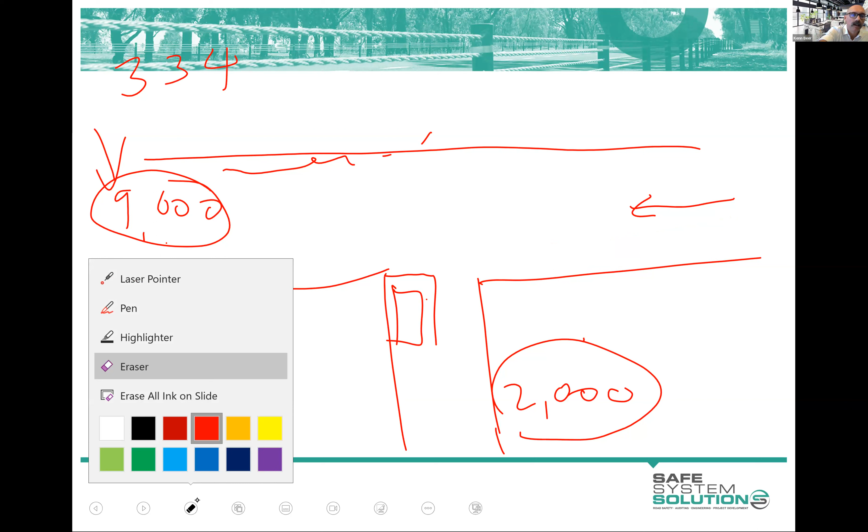So that's one thing. Then if you're worried about this sightline issue here, that vehicles can't see approaching vehicles because of that car parking, and if you proposed to remove the car parking, okay, you've opened up that sight line. That vehicle is now very clear. You can clearly see the vehicle. That has influenced the likelihood of crash only, because there's less chance somebody will make that error to pull out.

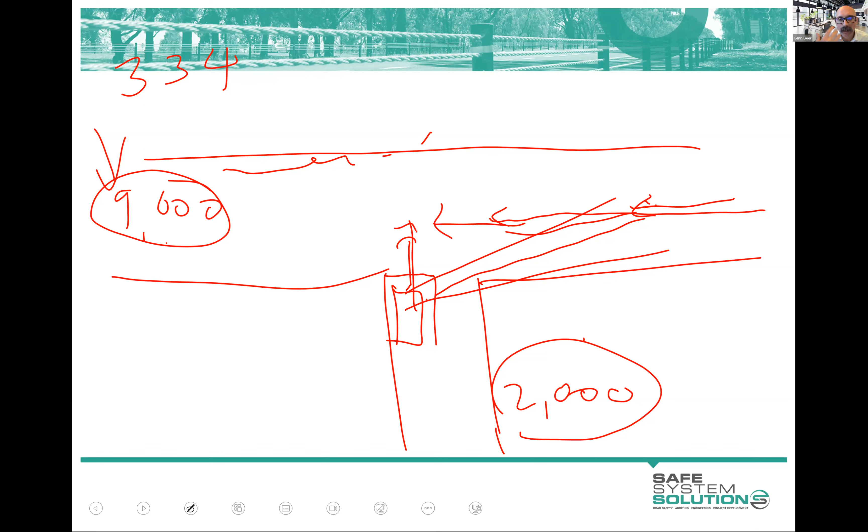Now, some of you will be saying, but this vehicle's now got better time to see, to slow down, and so any crashes will be slower. And that's true for the bulk of crashes, but this vehicle can still be traveling along unabated, they have priority, and this vehicle at the last minute pulls out, and we have the same severity, we have the same angle, so that severity remains. Okay, less numbers of crashes will be at that severity, but they still can absolutely occur. So that's why we'd only call the removal of that parking a supporting treatment.

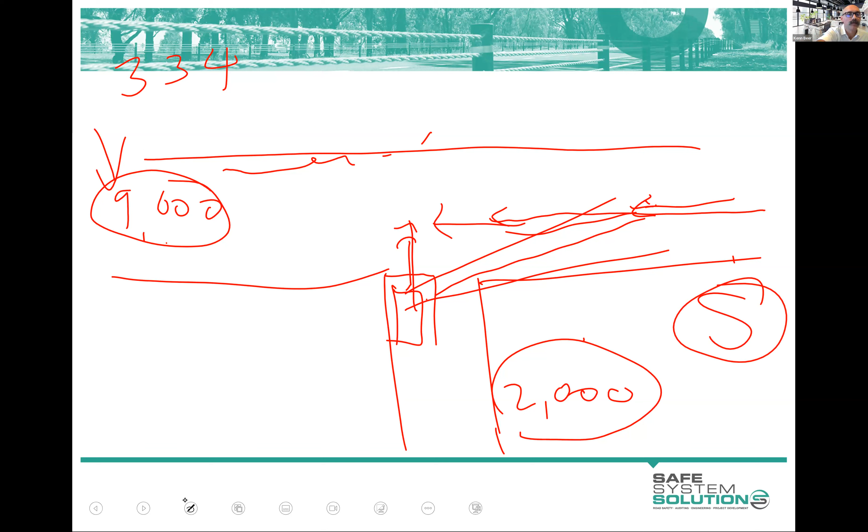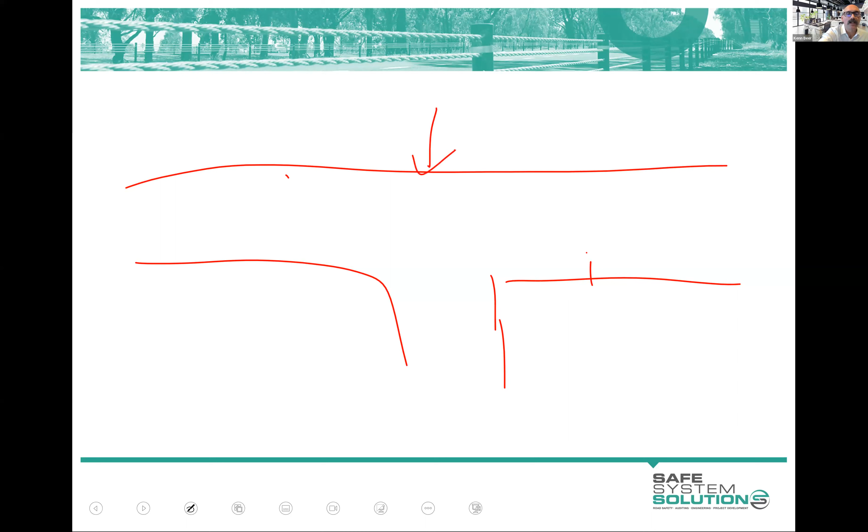The primary treatment in these situations is the measures that actually change the speed of the vehicles into tolerable levels for that vehicle-to-vehicle crash. So that could be a roundabout, it could be raised platforms, for example. Raised platforms through here, or a raised intersection, something to slow this vehicle down. So that means that that vehicle is going to slow down regardless of whether there's a vehicle coming out or not.

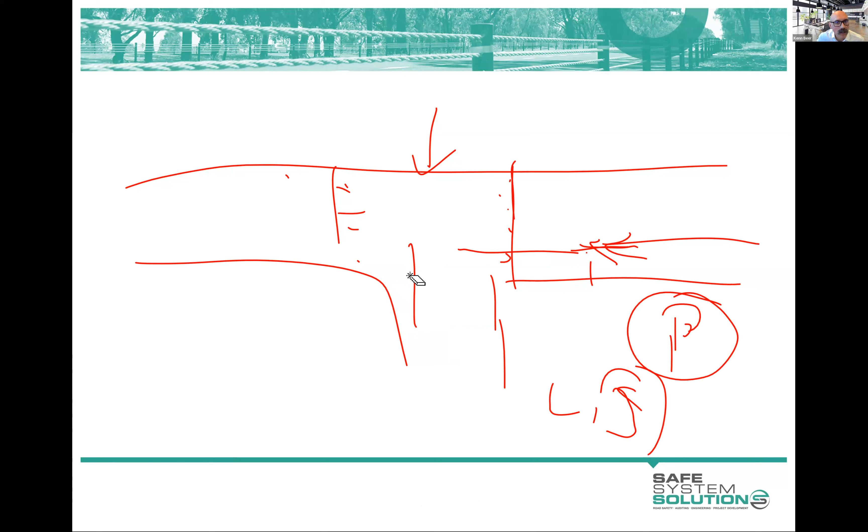And so those are primary treatments, and they address both the likelihood and severity, or sometimes just the severity of crashes. What else do I want to say on that? A primary treatment in this scenario would also be to block off the intersection. I think we've been through that sort of example before, but I thought it was worth doing again, and maybe it's sparked a question or two.

I think some lights are flashing here, which means somebody's asked a question. Yeah, Ken, would there be a runoff road exposure figure for each road segment, or do you look only at runoff road for the major road? That's a very good question, and let me explain that then. I'll draw the intersection again. So you got 9,000 here, and you got 2,000 here. So of course, there is runoff road risk down here for these 2,000. But in this assessment, you would take the 9,000 and assess that if you were doing the intersection.

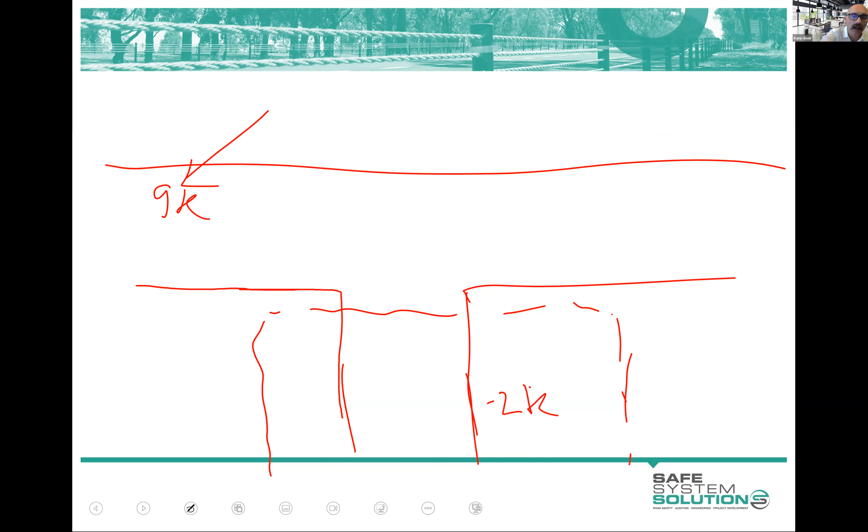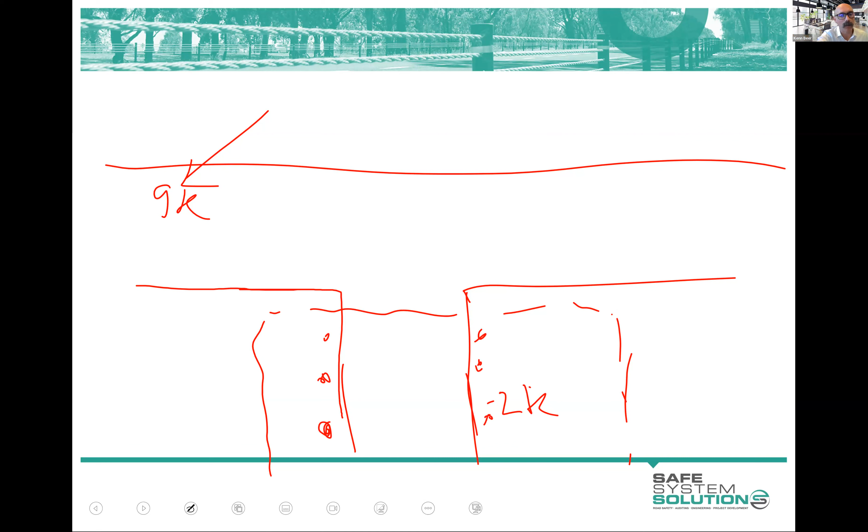But if you wanted to look at the 2,000, what you'd actually have to do is do another matrix for some other scope down here. So you'd have to do a second matrix. The reason for that is that you end up clouding risk or enhancing risk if you focus on that. So the easiest way to explain this is, say you've got power poles close to the road down this. If you then say the likelihood is this number and the severity is this number, but the exposure is that plus that, then you're saying there's a high exposure to these risks. Well, there's not, is there?

There's a low exposure to that risk, or a lower exposure. It's 2,000. So you need to then separate that out as its own entity. So we take that, and you might make some comments about that in your assessment, but for runoff road, head-on and generally for other or sideswipe crashes, it's taken off the main volume.

What if it's a four-way intersection? Again, you take the highest volume road and you assess it. But if you had exactly the same volumes, you might need to do two assessments, and just pick one. We're assessing that, and then we're going to assess that and that combined. They could probably combine to an assessment if they're homogeneous, if they've got the same general characteristics.

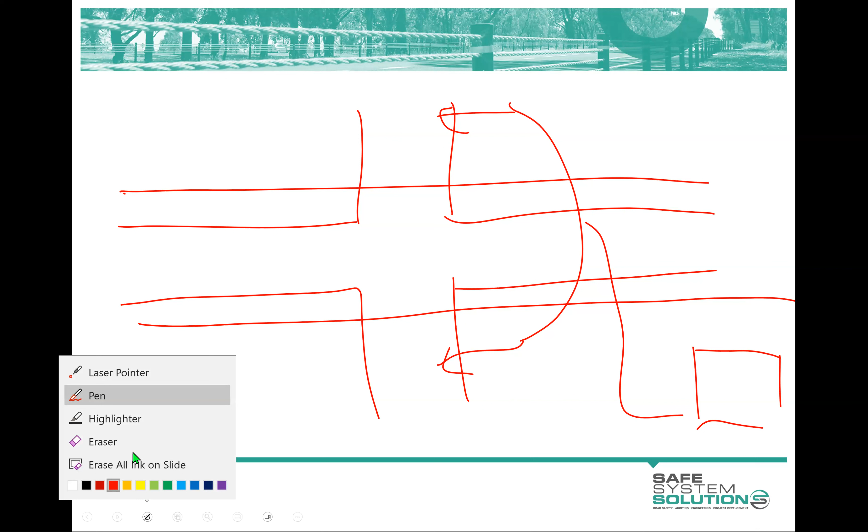Thanks, Ken. In your first example that you drew up for us, it's probably gone. But there was a clarification question that came in, which is these sorts of changes would have the impact of lower likelihood of high severity and higher likelihood of lower severity. Is that a correct interpretation? Possibly, yeah.

A roundabout kind of demonstrates that, which I did put in as one of the options, where we know roundabouts tend to give us some rear end incidents. People make abrupt stops and the occasional minor bingle. So that's why we tend to not talk too much about roundabouts giving us a significant reduction in the likelihood of crashes. But that comment is absolutely correct in the sense that severity of crashes is very much down. So it's a reasonable point. Think about this from the individual site perspective, but I generally agree with that.

Some really good questions there, so thank you. And I hope that's helping people get some clarity in their mind around exposure, likelihood and severity, but also primary and supporting. But actually, I think I'm sharing screen, so hopefully I can do this.

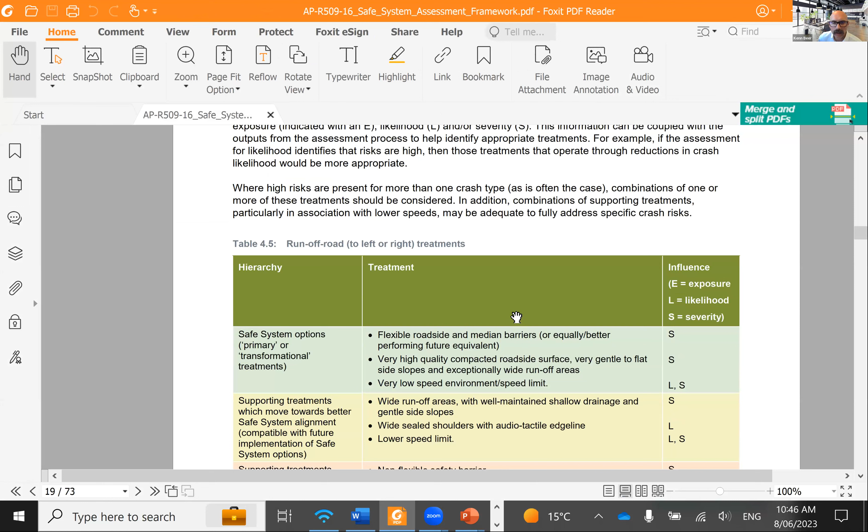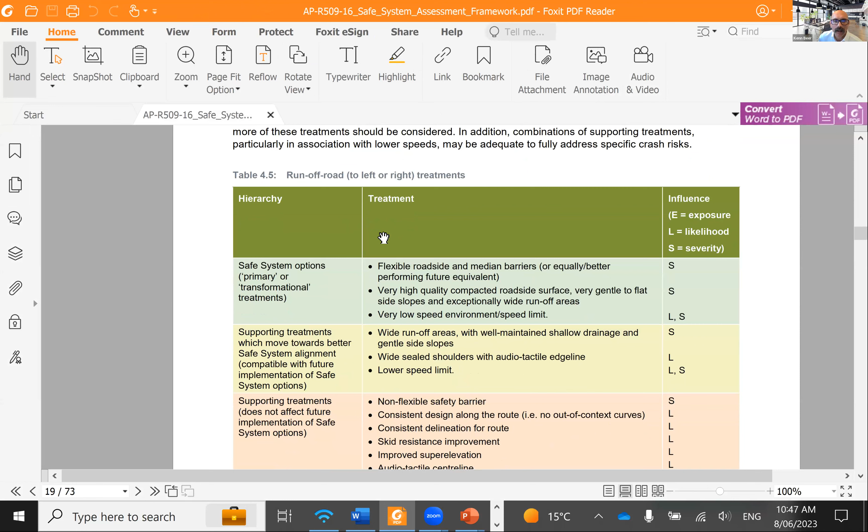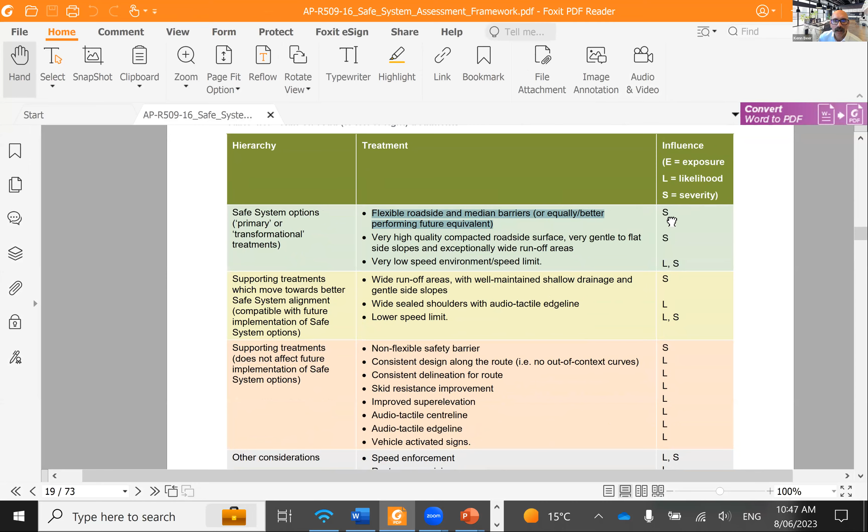So hopefully you're seeing the Safe System Assessment Framework now. Yeah, all good. So Kathy or Marissa showed you this last time, but this document's in the learning management system, in the resources, and if you get to these tables here, they've got run-off road, and they've got treatments, flexible roadside barriers, and they talk about, is that going to influence exposure or likelihood or severity? Severity there, and it's a primary treatment.

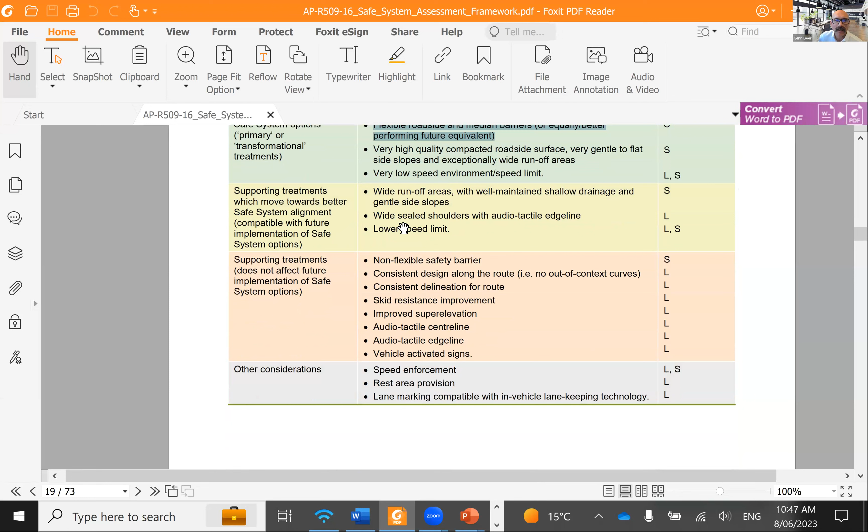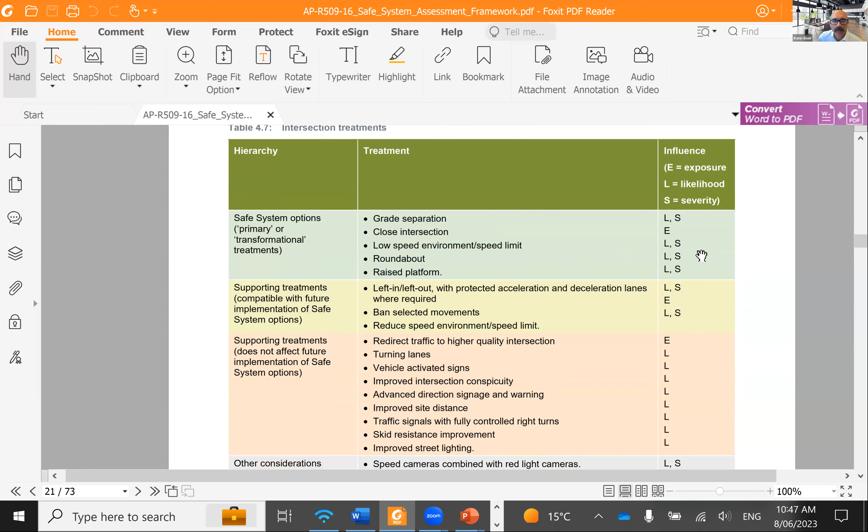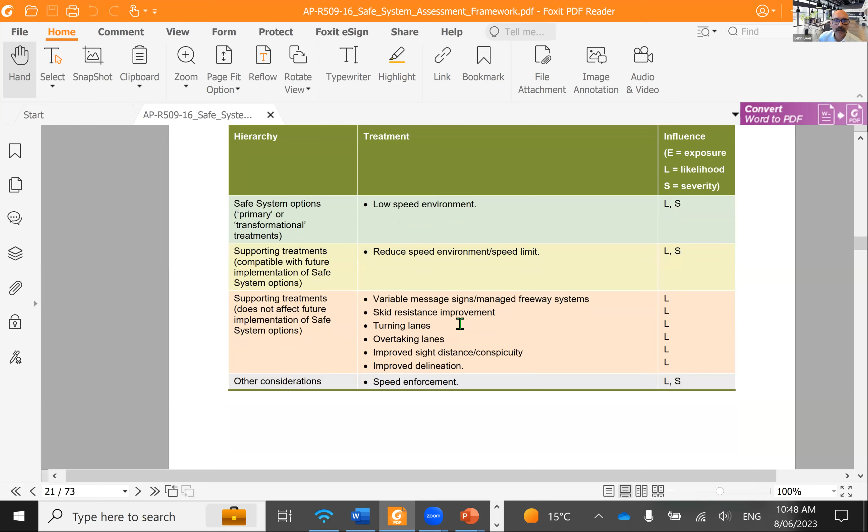So you can see these different categorisations laid out for us for different crash types, head-on treatment, all of these ones, then down for intersections. And we've got all these different treatments, and you can see roundabout. Roundabout's giving likelihood and severity. There you go. We have to accept that because that's what Austroads is saying. Raised platform, other crash types, pedestrians,

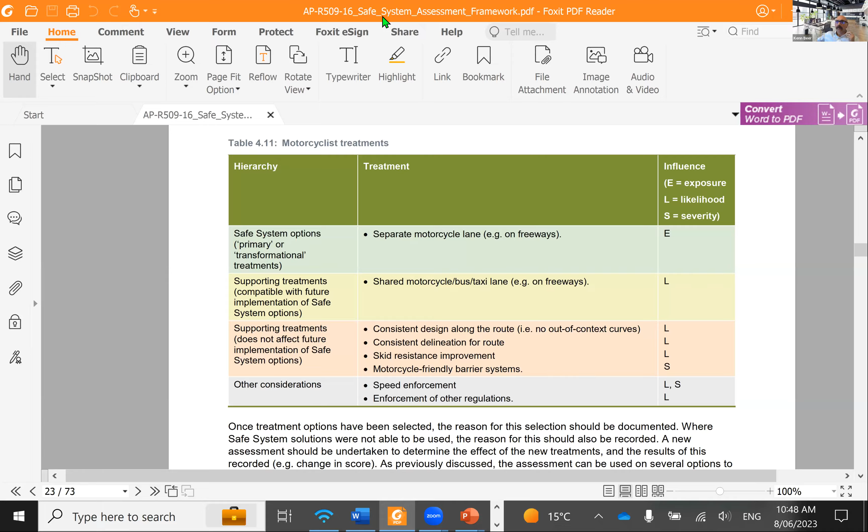cyclists, and motorcyclists. So you're getting some information there that helps you as you're trying to identify where things might be exposure or likelihood or severity, but you're going to find a lot of things that are not listed in this table that you want to write down, and then your recommendations into primary and supporting treatments. So that can be very, very helpful. So pop that over there.

And so questions come in there. Would head-on crash types have the same exposure calculation as run-off road? Yes, they do. So we use that same exposure.

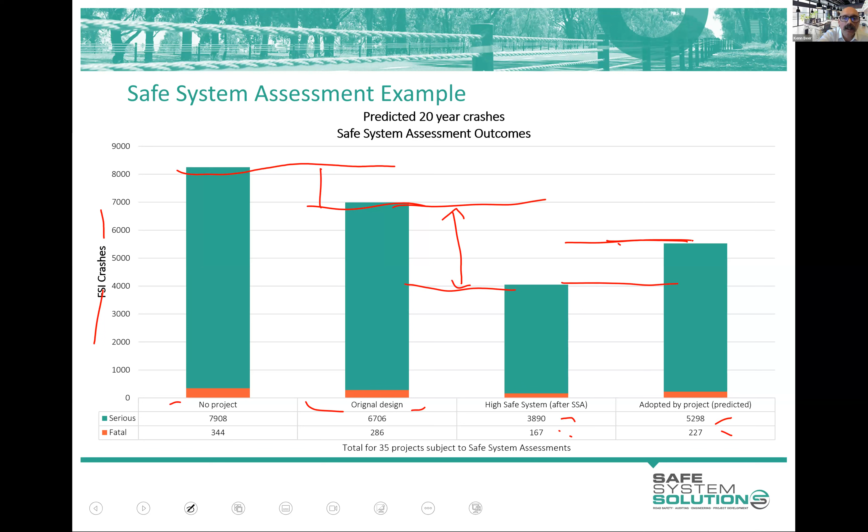But the amount we can do to get more improvement is huge. So all of this is potential improvement. The difference here is quite interesting. It's questioning, well, we recommended some stuff, but why aren't they doing it? And this is a highly interesting and complex difference to analyze.

But in that one, we see things like concerns that might not be good. The community won't accept that, or concerns politically it won't be accepted. Sometimes it's funding. They can't afford to do that. Budgets are set. Maybe they've uncovered a cultural heritage site, so they can't do that widening that you're suggesting or the like. So there are practical reasons why some of these things can't be done. But in a lot of these cases, we're trying to push and hopefully get people to do some improvements.

But the difference here to here, that is our value of safe system assessments as they sit now. It is literally just going through the process that we were able to systematically look at exposure, likelihood, and severity, identify things, make recommendations. And they were able to, within all of their budgets and constraints, make changes to these projects that have made that significant step change in death and serious injury. So it's an immediate win. Now we need to look at this and try to keep improving that and get that change to be lessened.

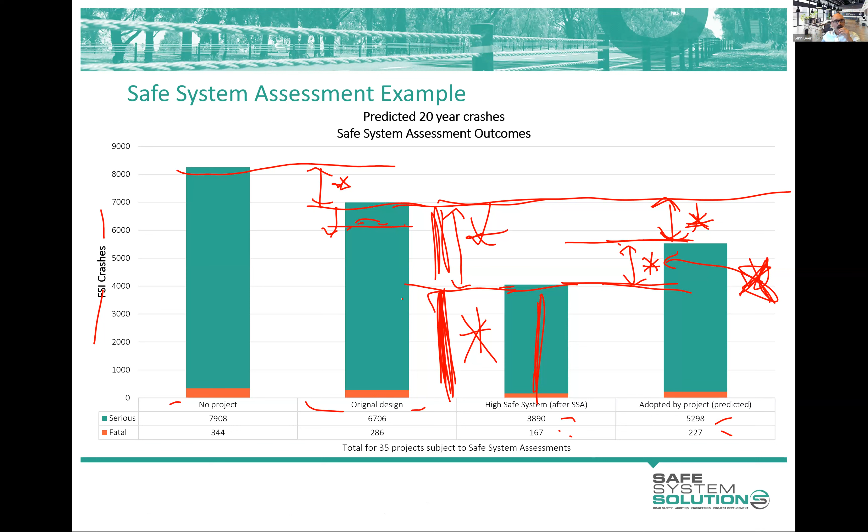Okay, let me just jump into another slide or two, and then I'll give you your stretch break.

We just pulled out of the Victorian government's document some of the benefits of safe system assessments, as identified through those evaluations, but also through their operation of using safe system assessments for 7 years now. A great way to determine how well a project aligns with safe system principles. And that's been a real shortfall before the assessment methodology, because it was really opinion-based. I mean, yes, there was agreement in the high-level strategic idea, that philosophical concept of the safe system, but once it was down to on-ground decision-making, there was just argument.

It's a great method to compare project design options from a safe system perspective. A road safety audit is not about comparing and scoring options. It's clearly stated within the Austroads Guide to Road Safety Part 6 and throughout road safety audit policies across the world. That's not its purpose, but the safe system assessment methodology is good for that. You've seen the way you could score things and you can get that input.

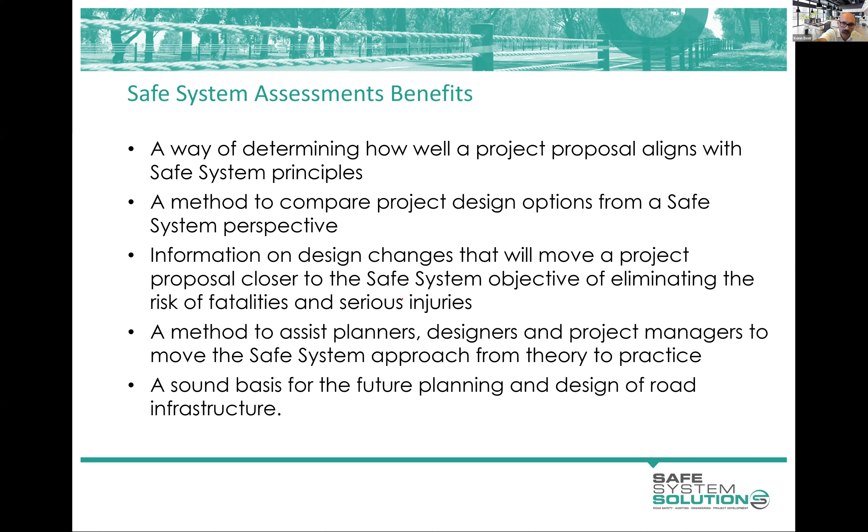So let's just go through the process of a safe system assessment. And the first thing is to say, well, when in a project's life cycle would it be good? Most jurisdictions still operate in saying, well, if we can do that safe system assessment early on and get that feel for safe system alignment, that's going to inform decisions on the intersection form, the cross-section. It's going to help us make those calls. Then when we've made those decisions around cross-sections, intersection form, the very specific details, a road safety audit lends itself quite well to that.

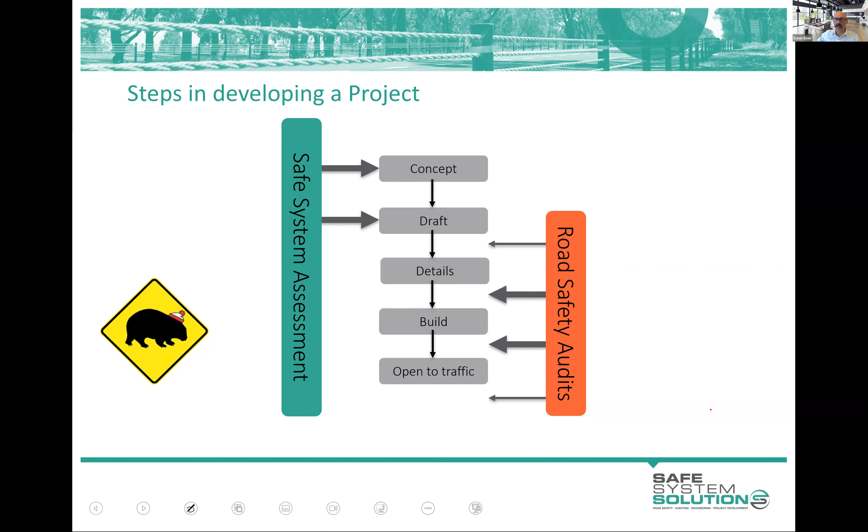Yeah, so generally early on safe system assessments and then road safety audits to follow. Not to say that safe system assessments can't be done further down the track, but that just seems to be a process that works well. But what is the difference between a road safety audit and a safe system assessment? Well, there used to be a lot of difference, and this difference is, I suppose, starting to shallow down a bit. But this table here helps a little bit.

Identify issues that impact the likelihood of crashes. Both methodologies are really good at that. Issues that impact on the severity of crashes. I say sometimes for road safety audits; they're getting better. I mean, severity is part of the risk assessment methodology in a road safety audit. However, it's more at a practical level. We used to see a lot, and we still continue to see these come through, where the road safety audit is focused on the likelihood factors, sight lines, surface, confusing signage, hugely important likelihood factors, and we've got to get all of that right.

But the severity was ignored when these happened. So they were basically saying, oh, if you fix up all the signage, we won't have any crashes. Well, the safe system assessment is saying, you fix up all the signage, and that's good because we'll lessen the chance of a crash. But a crash is still going to occur, and we need to address how bad that's going to be. Exposure really wasn't looked at as its own distinct element in road safety audits. It was embedded and entwined into likelihood.

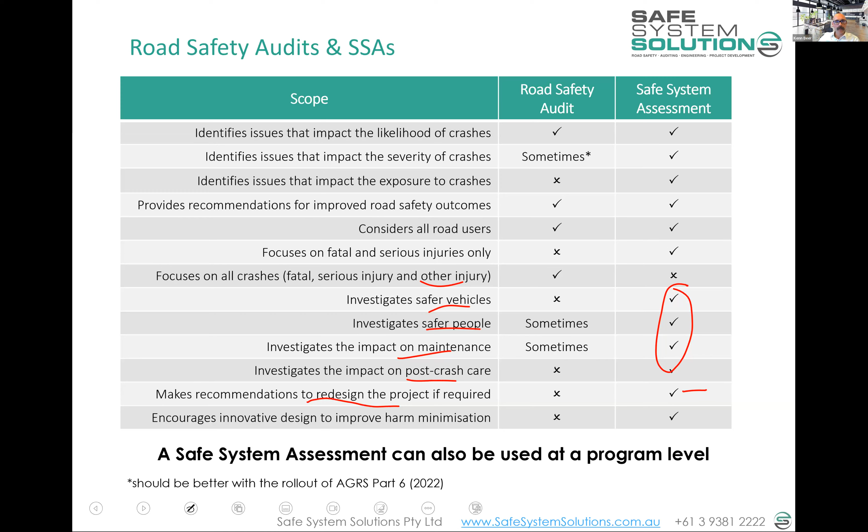So the process of a safe system assessment goes along the lines of you determine, are you going to do a full safe system assessment or are you going to do a rapid safe system assessment? I will tell you the difference between those, and they're not markedly different, but there is a difference. And that is the end asset manager's purview. They make the decision. Is it going to be full or rapid? And then they select a safe system assessment team.

And then there's this sort of exchange of information. Could be a sit-down meeting, could be emails and a phone call, whatever it is. But it's all about the assessment team getting the information they need to do the assessment. It's about any questions being asked, any clarification. It's about the client or those people getting the assessment done knowing the process, what's going to happen. I will, in the next couple of slides, tell you the difference between the rapid and the full safe system assessment.

Then the site is inspected and the reviewing of the designs and the matrices are completed. It could be one matrix if it's just existing conditions, and they say, we want a safe system assessment of the existing conditions of this intersection, and that's all you do. Or if they've got 25 design options on the table, well, you would do 26 matrices. You would do one of the existing conditions, and then you would do a matrix for all of the different design options. If somebody came to me with 25 design options, I'd say perhaps do some refining of that first. You're just gonna do a lot of work in matrices, but it's possible.

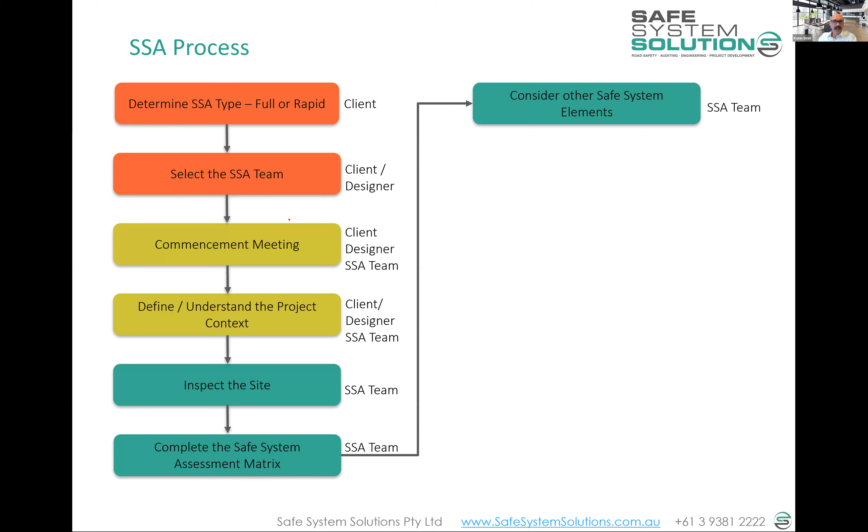Then if you're doing a full safe system assessment, you consider those other elements of the safe system through those qualitative questions we gave you. They're in the Austroads framework. I talked you through all of these specifics at the end of last session. And then we identify treatments that are going to improve alignment with safe system principles. So there are recommendations or things for the project team to consider adding or changing.

It's all written up in a fairly standard form, and you're using one of those templates at the moment, which we encourage you to reuse when you're doing assessments in the future. Brand it in your own branding, that's fine, and there's no copyright issues on any of that. It's about consistency in industry and the reporting of safe system assessments.

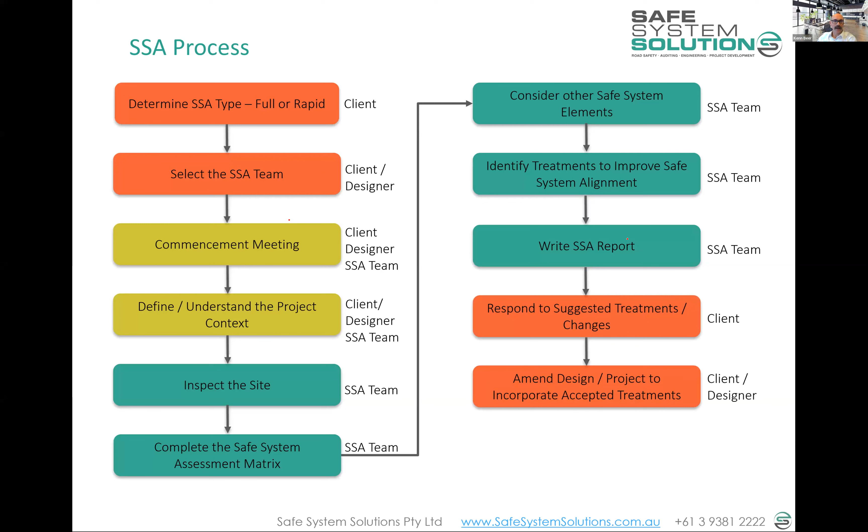And then the receiver of the assessment report accepts what they're able to change, changes these things accordingly, improves the design and incorporates them in. So that's our overarching process. Sometimes at this phase here, it goes back to here.

So, it's assessed, changes are recommended. The client says, yep, okay, we're going to take all of these on. Can you do a final matrix for us on what we've ended up deciding to do? And actually, I like that for a number of reasons. One is the story it can beautifully tell, because if you are able to then take this up to your management or part of your business case and you say,

this is the existing condition, and this is the risk score or safe system alignment score, and the lowest score is better. That's the existing conditions. We came up with a design that was here, and then we got it safe system assessed, and they came up with recommendations, and that's brought it down to here, right? You're able to show that story.

Hey, we got some good designers in, they did a decent job, they improved things. But we've really pushed hard because of our commitment to getting the absolute best we can, and we've got it down to there. That tells that story. And anybody who then says you're not pushing for safe system alignment, you're not pushing for safety, that's great evidence that you are.

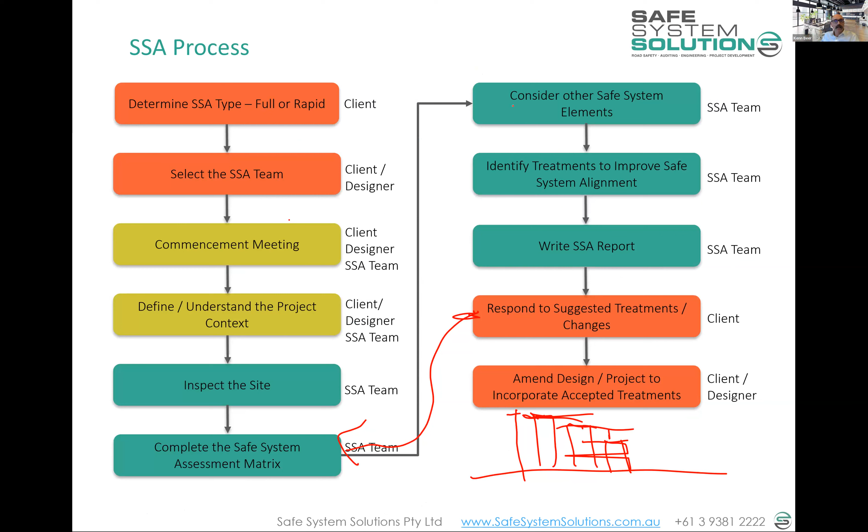Now we're going on time here. I'll keep going with a couple more slides because it's not quite half time. Let me just cover this off. I promise I am coming back to the difference between rapid and full safe system assessments, but I want to point you at something which is around your accreditation.

There are different schemes around Australia which formally recognise safe system assessors on government databases. Some jurisdictions just say, if you've got a certificate from a safe system assessment course, we're happy enough with that. But certainly Victoria has a register of safe system assessors. It's on the VicRoads web page, safe system engineering page.

And what they say is you have to do this course. So you've successfully passed the course, so you're well on your way to that. Then you just have to submit a safe system assessment that you've done. They will review it, and if they believe that shows you have the capability and the competency to do a safe system assessment, they will put you onto that list. The list is just a PDF that gets updated with people's name, organisation, email address, and phone number if you want it displayed.

So that's one. And then the South Australian government has a list of pre-qualified safe system assessors. They use the term pre-qualified in a different manner to most other jurisdictions. In most other jurisdictions, pre-qualification is associated with a company or a consultancy and their insurances, and then they've got the ability to do this. Pre-qualification in South Australia often lands with individuals as well as companies, but there's a list there.

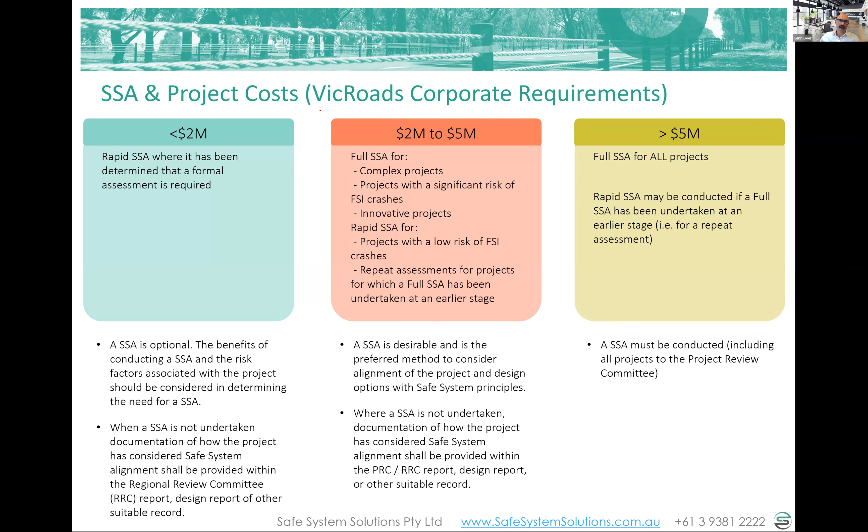So I'll pop these on the screen for now, and we're going to take a 5-minute stretch and coffee break, and I'll come back and explain it. If you get back early, you can have a bit of a read yourself. Let's take 5 minutes and we'll get back into it after that.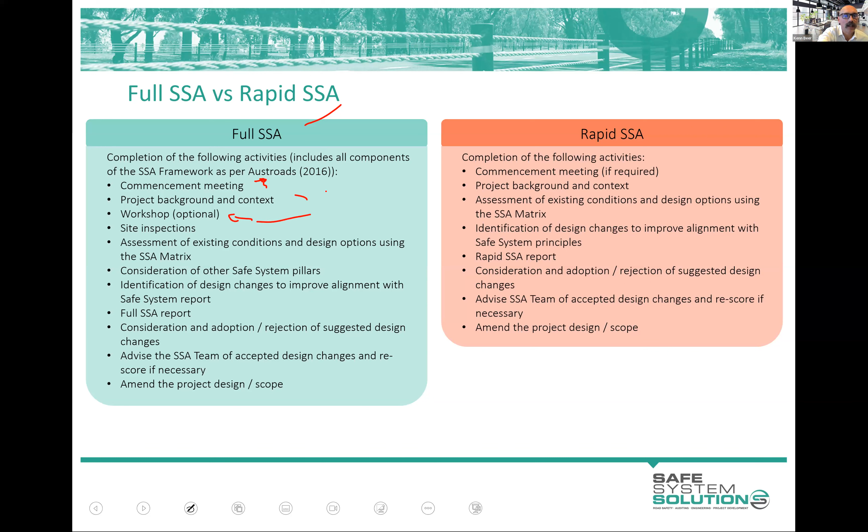Probably the easiest way for me to go through this is to talk about the full and point out the ones you don't really have to do or are optional as part of a rapid. So the commencement meeting is optional as part of a rapid. For a full one, they want you to have some sort of catch up with the project team to really understand things. You're going to need the background and context because you can't do anything without understanding that. The workshop, which often links with this, is a bit optional, but usually that's all combined together. Site inspection is not specified as required with a rapid safe system assessment, but it is often done.

You need to do the matrix and the existing conditions and all the designs. You don't need to consider the other safe system elements, those qualitative questions, in a rapid. You do need to make recommendations. You just do a shorter report, and then they accept changes, they make changes, and they amend the design.

So, you know, it's sort of 75%. A rapid is about 75% of a full. So it's not like one takes an hour and the other takes a week. They're close-ish.

Okay, so at this point, I just want to talk about some different road environments, and I'll do it fairly quickly. I want to talk about what aligns highly with safe system principles in these road environments, and maybe what we could do better. The reason is because your assignment is a safe system assessment on a specific location and a specific road stereotype, road characteristic. It might be an urban roundabout, or a more arterial road intersection.

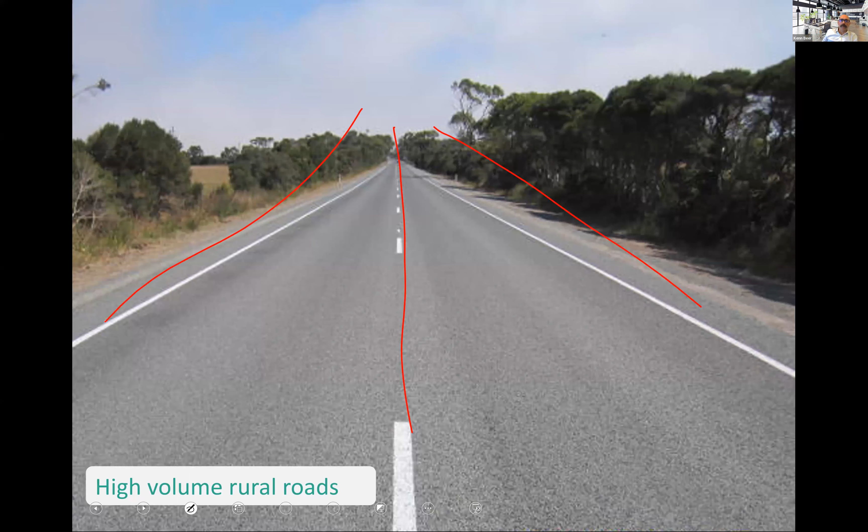But in our bigger roads, more high volume roads, doesn't look too high volume at the moment, but it is a higher volume road. These will get the infrastructure investment in order to keep speeds high, and that will include central barrier systems and outer barrier systems to gain that full containment road, and the speeds are then able to be kept high. And as we arrive at intersections, that's going to be a problematic area. If you've got a central barrier system down a road, you've got to stop it for the intersection.

But you can utilize major intersections. This is really simplistic, but if you put a roundabout, you're able to collect minor roads and access points and make it so this is the point of U-turn. So you don't need to break your barrier down the middle. And also you're getting all of that wonderful safe system benefit for the intersection itself. So you get multiple wins from strategically thinking about rollout of infrastructure along a route. Safe system route strategies really are that thoughtful.

If you've got a whole route and you've got lots of roads and access points and side roads, major roads and the like, you can think about it from that holistic perspective of saying, okay, we want to do all of this, but we can't afford to do this 50 kilometers all in one hit. But let's think about where we get the best bang for our buck from a holistic 2050 scenario. What's it look like in 2050, which is often the date people are aiming for zero death and serious injury, if we've been able to get the funds we want?

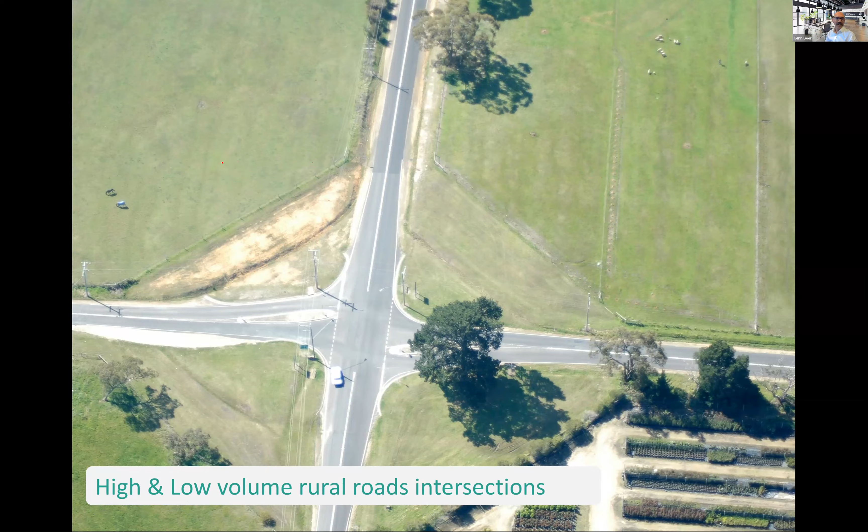It has to be completely separated facilities, and then there should be pedestrian overpasses and underpasses, or these intersections where you slow everybody down through that conflict point, because nothing can happen at 80 kilometers an hour and be aligned with our safe system threshold speeds at an isolated intersection like that. You would need acceleration lanes or these sort of things. So vehicles have to be slowed down at those specific locations.

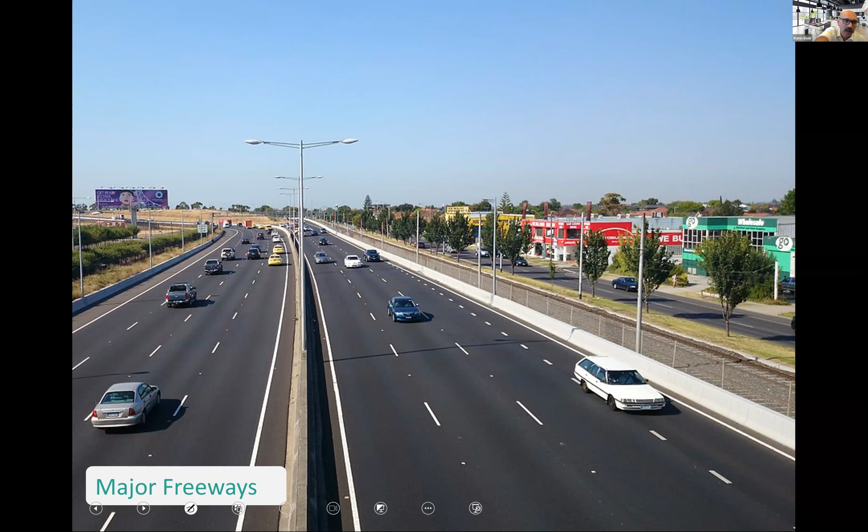So to get that further enhancement of safe system principles, we end up in managed motorway territory, which usually gets us further reduction in the likelihood of crashes. Managed motorways, for those who aren't familiar, is where you put lane use management systems. You can change speeds dynamically through traffic volume and algorithms to identify when vehicle flow breakdown is going to occur, predicting that and lowering speeds early. You're able to manage lanes and cross lanes off. You would also have on-ramp signals, so ramp metering and the like, which again reduces likelihood of crashes. Those are the kind of things that give us our additional reduction in the likelihood of crashes.

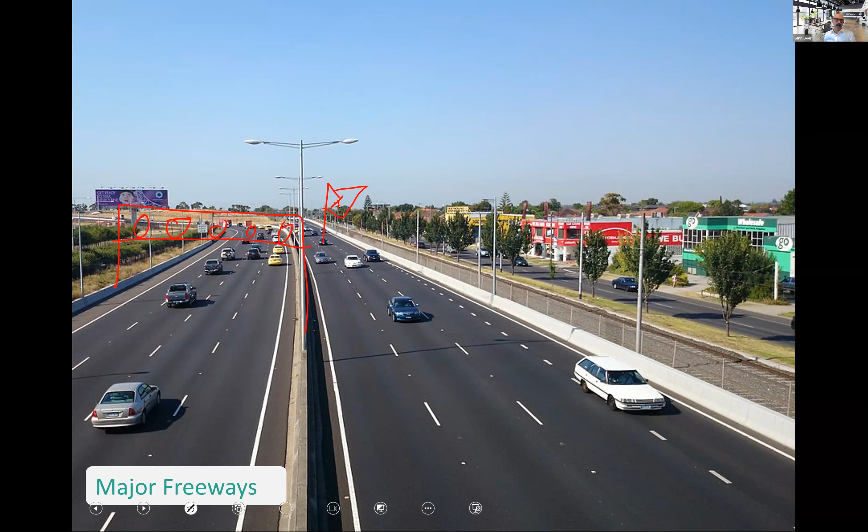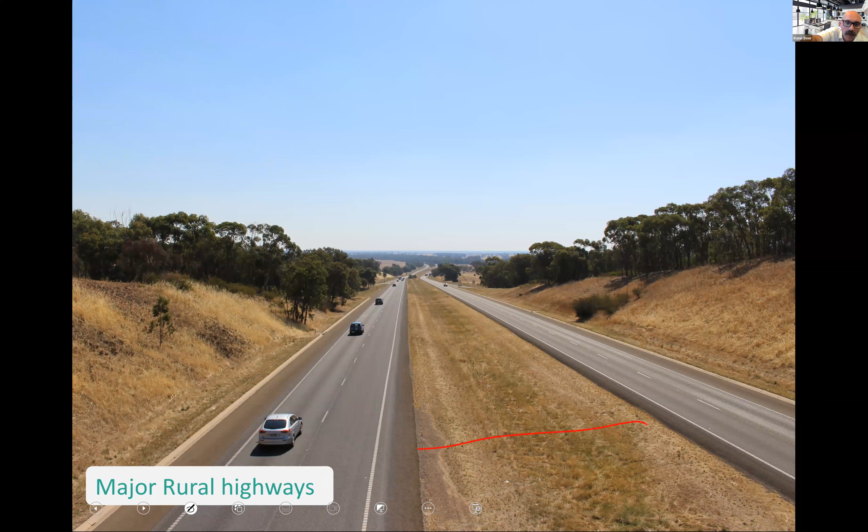And finally, major rural highways have full containment with barrier systems. If you're building one new, you don't need that much land in the middle, unless you plan to widen it to 3 lanes at some point in the future. Just a barrier system down the middle would be fine. But in these scenarios, retrofit with continuous barrier systems, as the Hume has nowadays. It's got that full containment.

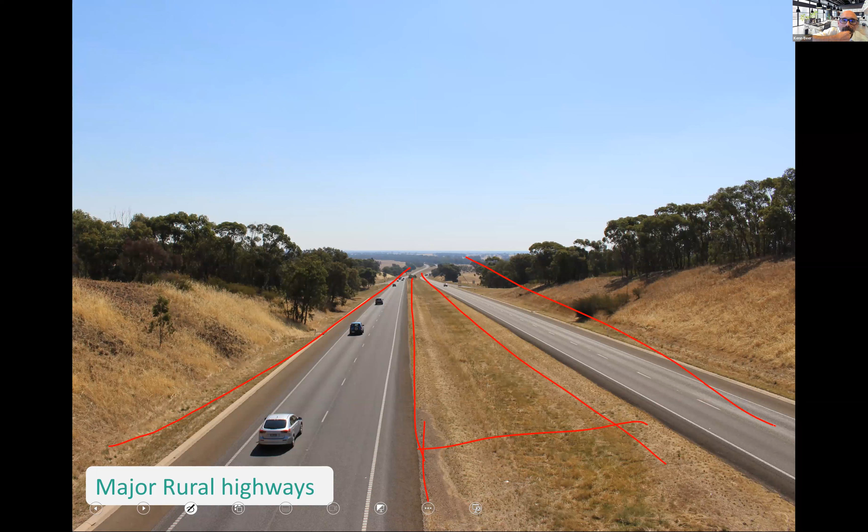And then when you get to intersections, grade separated intersections or roundabouts, which I still like. They're not popular on those major national routes, but from a safe system perspective they do well. But an at-grade intersection can operate in very high alignment with safe system principles on a road like the Hume or the Calder, if you've got the intersection that's got a big

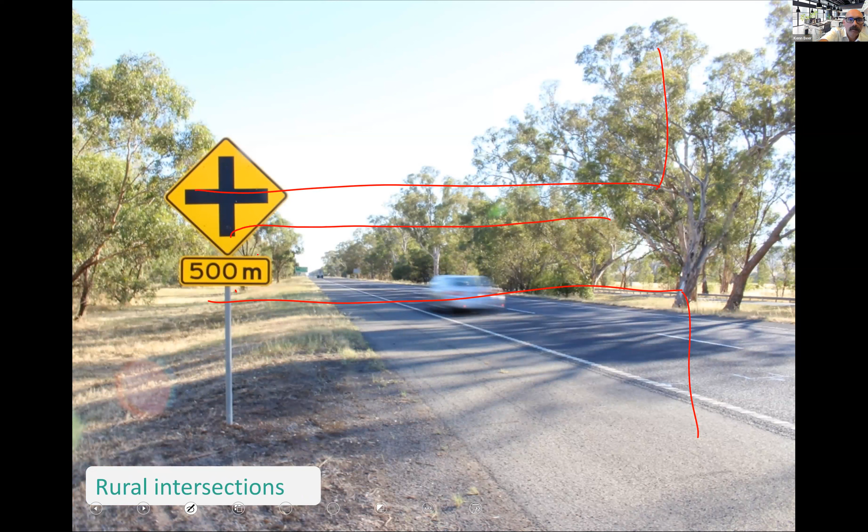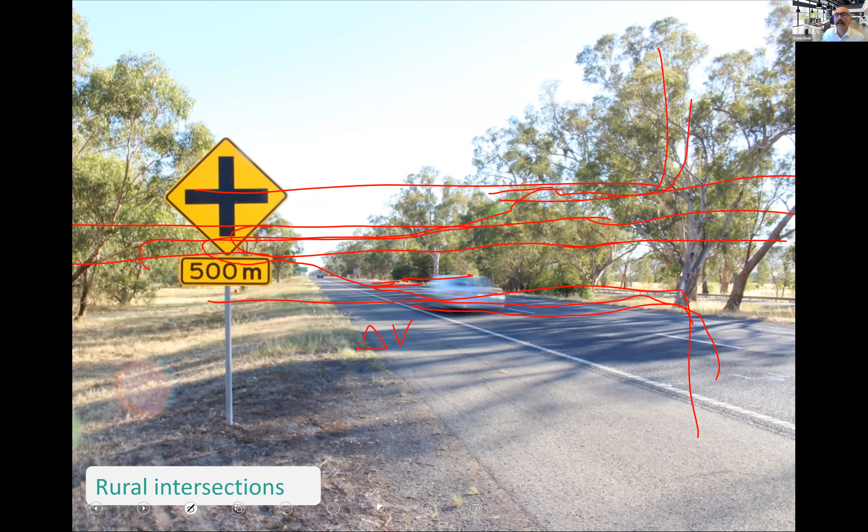median, or the median would continue on, you really would have to have a full-length acceleration lane, time for them to get across, a U-turn facility and acceleration lane. Then a vehicle can come in and accelerate up to a point where delta V, the change in velocity between those vehicles, is within tolerable limits. They're able to transfer over, same thing, accelerate back, and then make their turn or go straight. So that's one way it could be done.